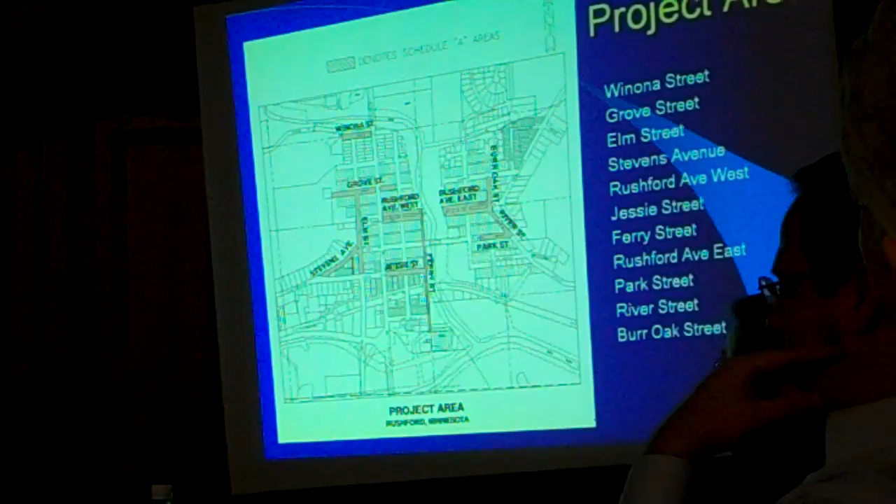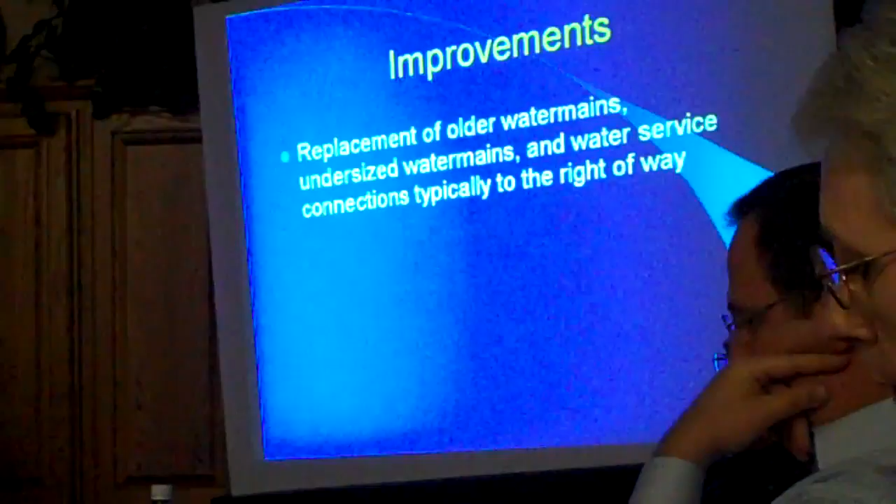Improvements. I'll go over the improvements that are happening in these areas. First of all, it would be replacement of older water mains, undersized water mains, and the water service connections typically to the right-of-way line. The older water mains that we're replacing were generally constructed in 1895. So they're over a century old, a lot of them put together by lead joints. And this is something that we're replacing.

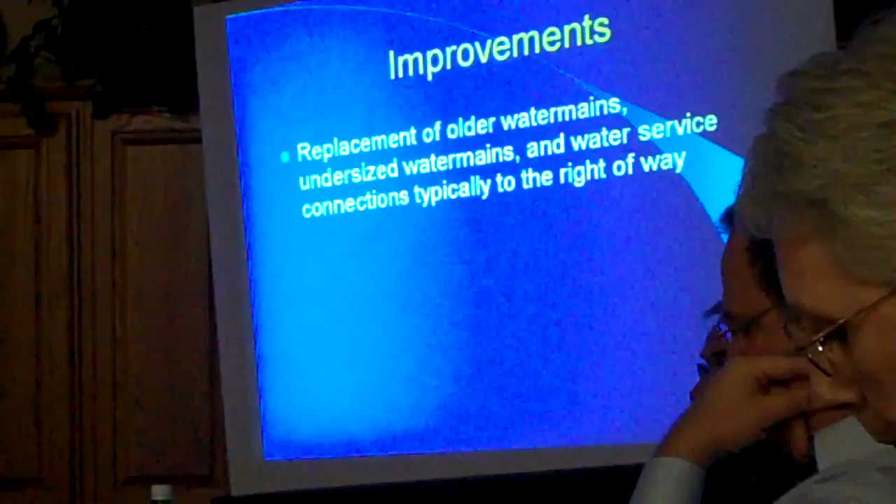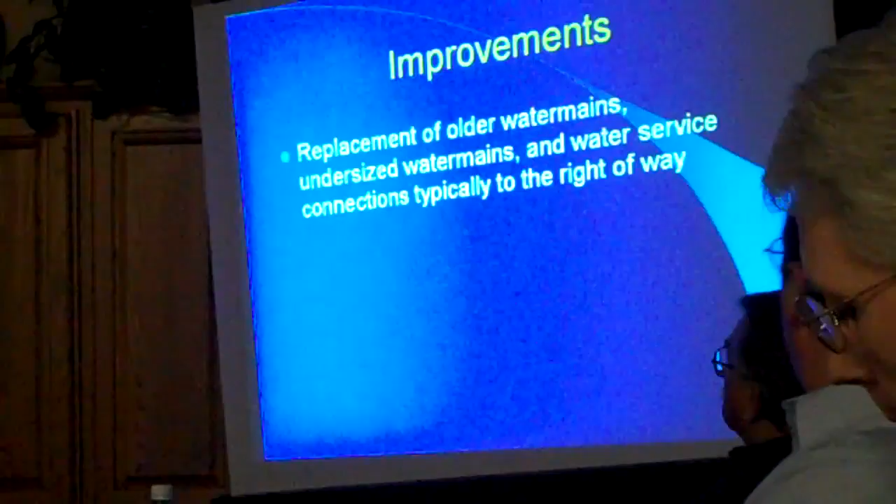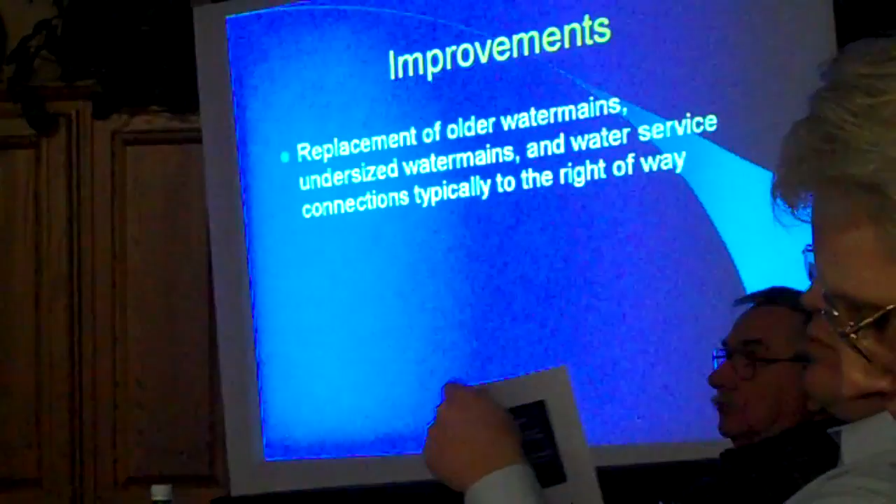In some other areas, we have some undersized water mains. The state requires mains to be larger than 4 inches. And there's an area on Ferry Street where we're replacing some 4-inch water main with a larger water main. And typically, as far as the services go, they'll be reconstructed up to the right-of-way line. In some cases where there's walls, we may be slightly past it, but typically that's what we're looking at doing, is replacing it to the right-of-way line.

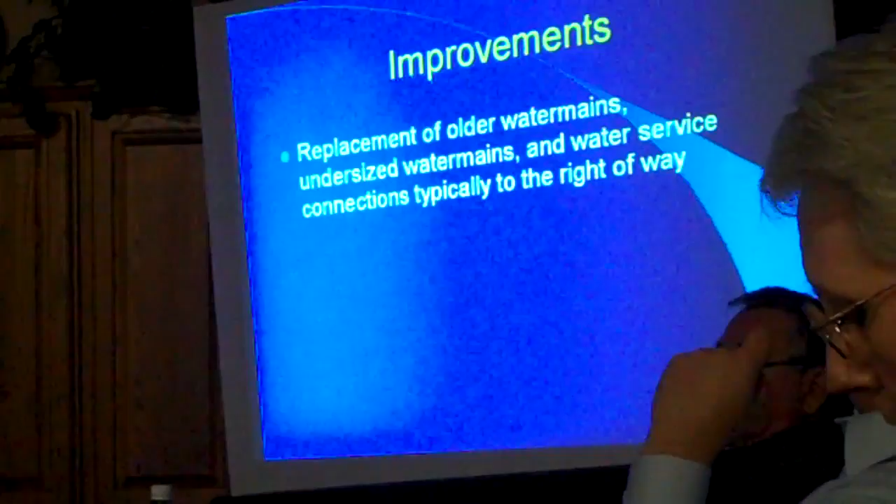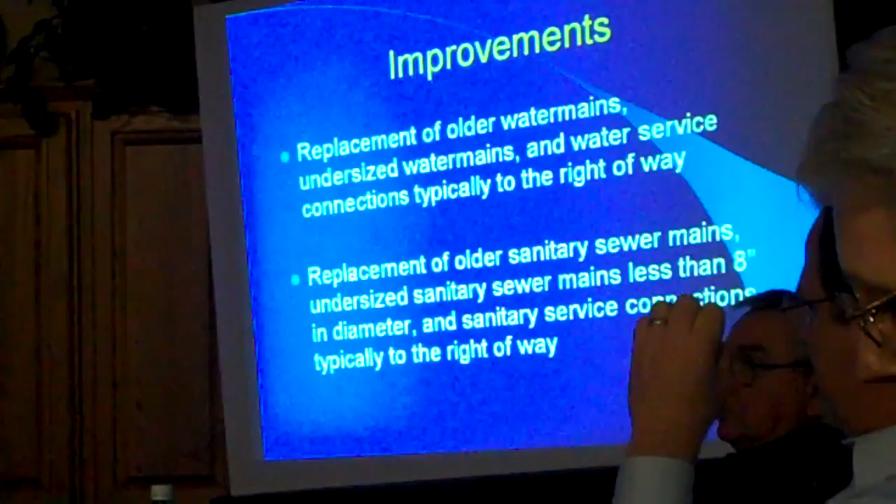Secondly, is the replacement of older sanitary sewer mains, undersized sanitary sewer mains that are less than 8 inches, and sanitary service connections, once again typically to the right-of-way line. Some of the older sanitary sewer mains, there was some work done in televising those mains, and found that there's significant I&I problems in those areas. That's one of the reasons we are replacing the sewer. New trunk main: there's a 12-inch main along Ferry Street that will be upsized to a 24-inch main. The difference in the price of the pipe is incurred by the city. And once again, the services, typically to the right-of-way line.

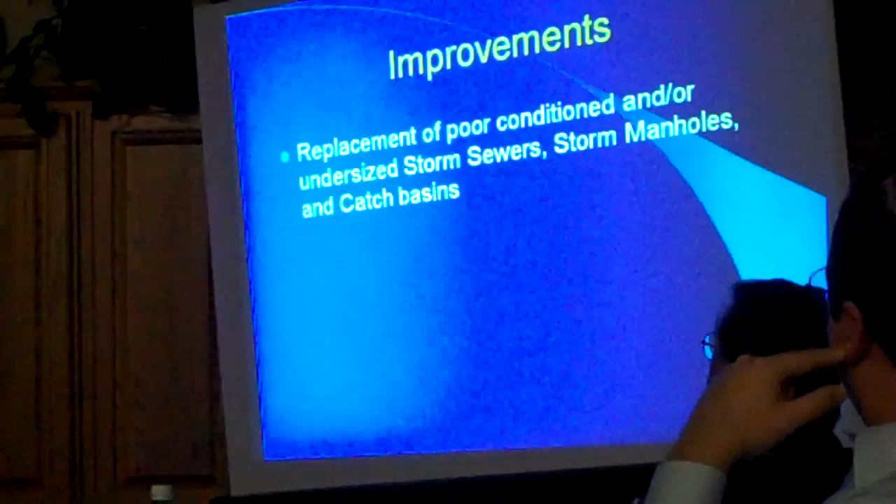Replacement of poor conditioned and/or undersized storm sewers, storm manholes, and catch basins. In the streets that we're working, there's some storm sewer that needs to be replaced, and we'll be doing that. That's a cost that will be incurred by the city.

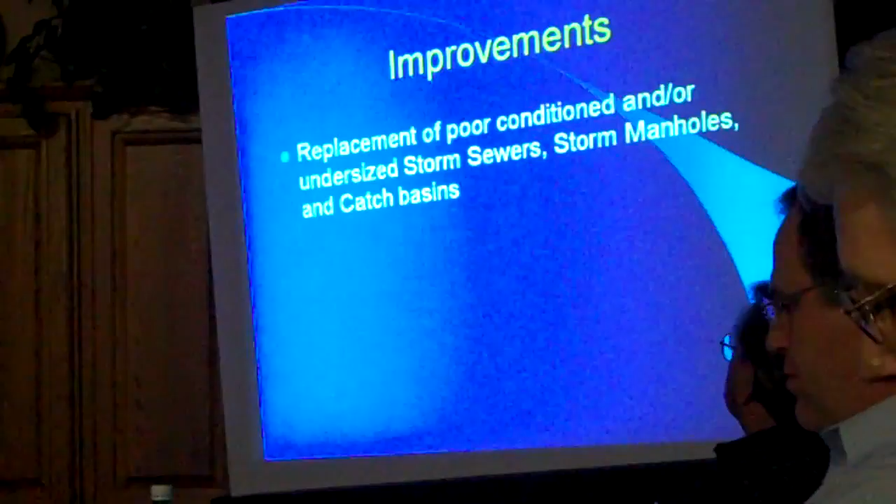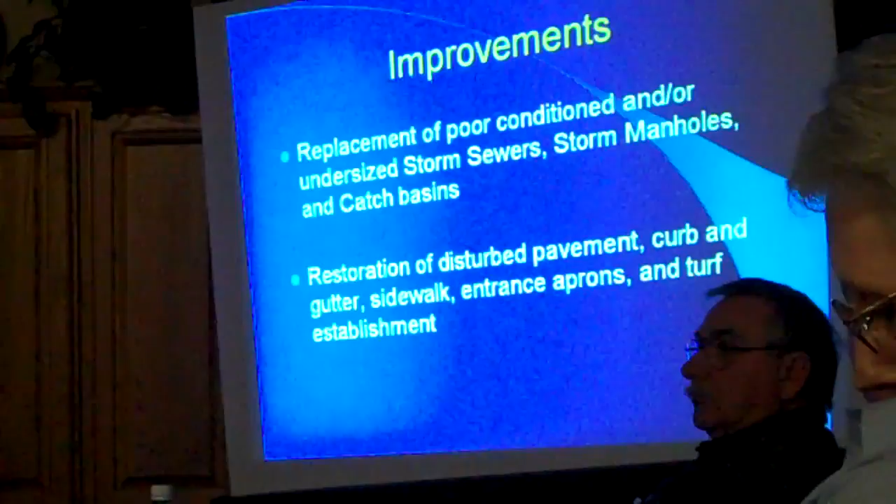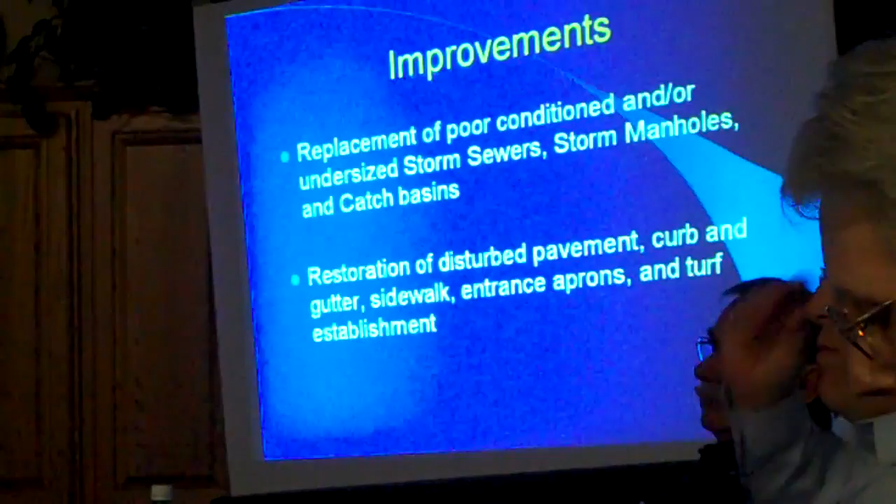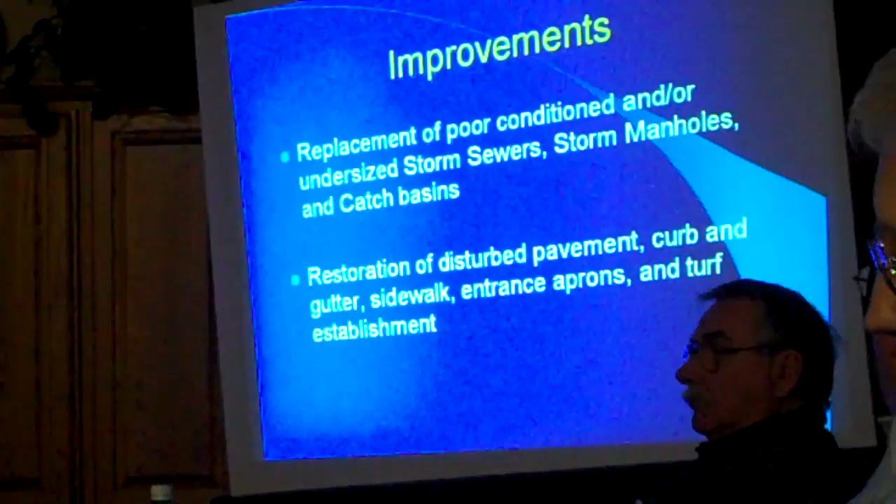And finally, restoration of disturbed pavements, curb and gutter, sidewalk, entrance aprons, and turf establishment. For the most part, the streets themselves will be completely paved, the width of the street. In areas where curb and gutter are disturbed, it's generally where the services are going to go to the home, where we'll replace the curb and gutter. Areas like Ferry Street, where it's narrower, the curb and gutter on the east side will be entirely replaced. And also sidewalks, entrance aprons, and then reestablishing the boulevards. So that gives an idea of the improvements that we're looking at doing.